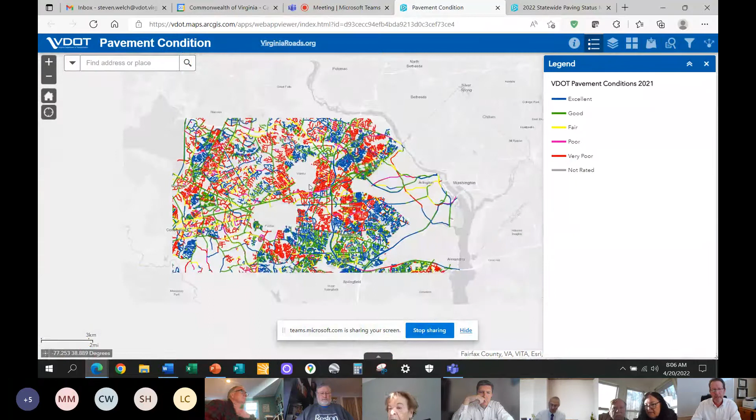One thing I've pointed out before is that we do not repave roads in the cities and towns or private areas, so that's why you'll see some empty spots. But as you can see, we have over 14,000 lane miles of roadway in Fairfax County to repave. So this is our pavement condition map, and again you can toggle around and move on it. Some people find this very useful and helpful to understand where things are. The next one I wanted to show you was our paving status map.

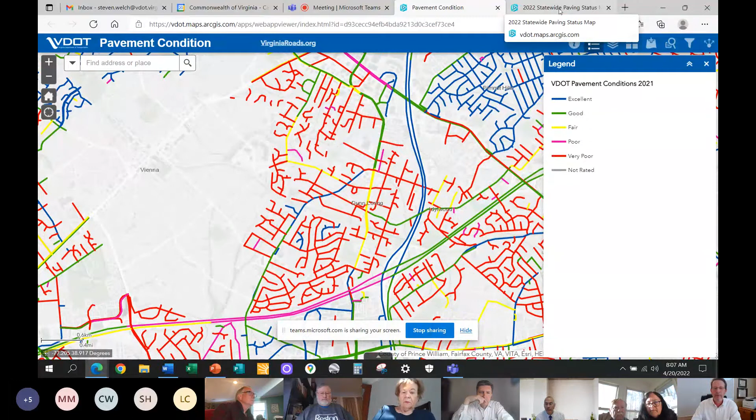This is what we are going to be doing this year. This is the active map that shows where we're paving roads in Northern Virginia this year.

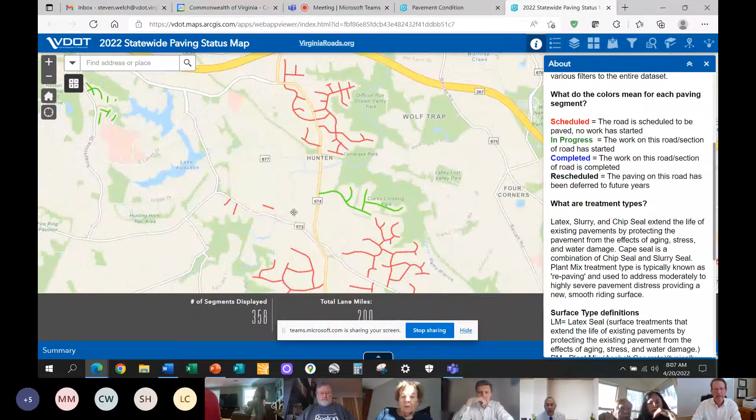I can zoom in here in this area, moving up into the Hunter Mill area mostly. As you move around, a couple nice things about the map: roads that are going to be worked on are scheduled in red, those that are green are in progress, and those that turn blue eventually are completed. Over here, you can see we've started work on Centerville Road, I guess it is.

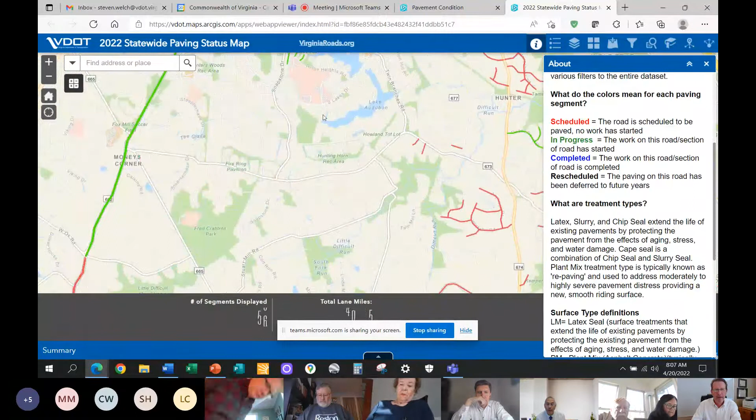Moving back over towards the Hunter Mill area, we go to a couple different neighborhoods. One of the other useful aspects of this map is you can click on a portion of it and it'll pop up the name of the VDOT project manager, their phone number, their email, and the contractor that's going to be doing the job.

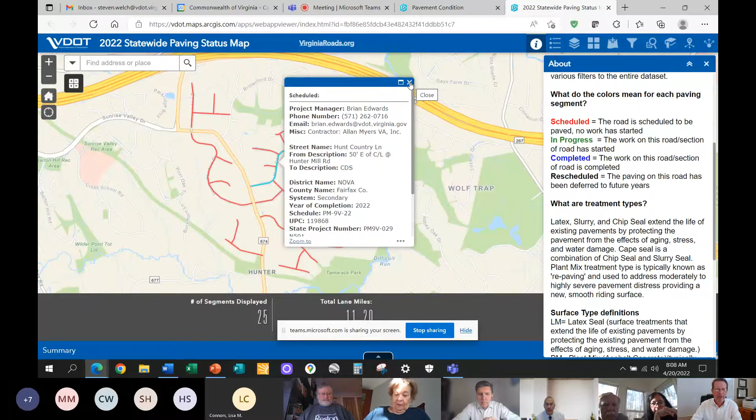When contracts are released, each contractor is given a window of time, say 4 months, to do 2, 3, or 4 different areas they've been awarded. We don't have the start and end dates on here, but you can email the contractor if you're interested in knowing when they might start, and continue to stay in contact with them for any questions, including after they've left.

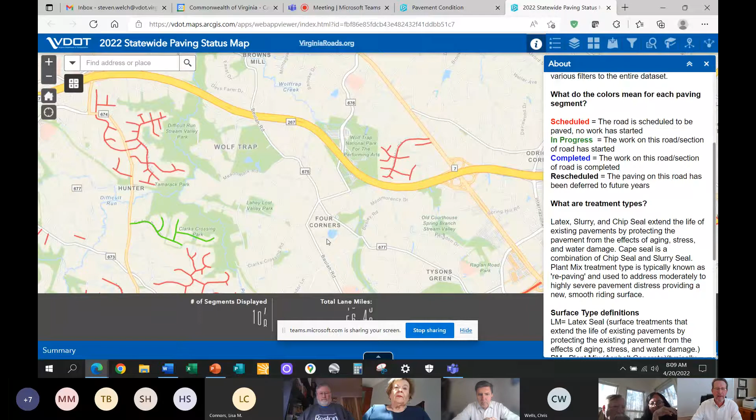Sometimes there's a question about when a piece of equipment is going to be removed because it's still sitting there. So it's a very useful map. We've been waiting for this to come out, and it came out a week and a half ago or so. That's a quick, brief overview on the VDOT pavement condition map and the schedule for this year.

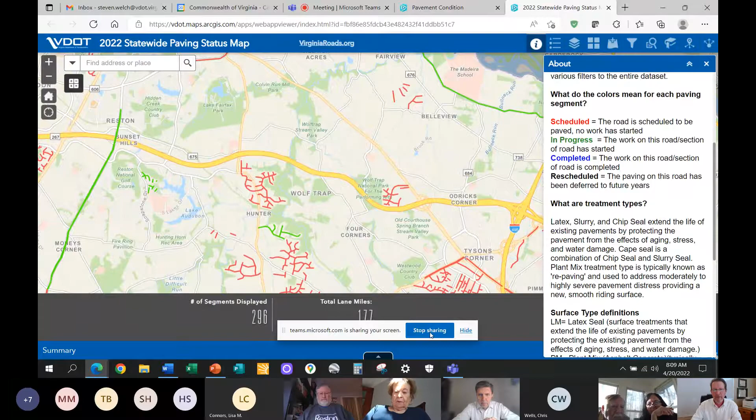I'm going to stop sharing for a moment. So the other two items I was asked to speak to: one is with respect to the school zone projects, one of which we are working on at Upper McNair Elementary School.

We're putting in a high visibility crosswalk in front of the school, along with an ADA compliant ramp, and reconfiguring the on-street parking in that area. We do have to remove some parking on both sides of the high visibility crosswalk for sight line distances, for both pedestrians to see cars and cars to see pedestrians.

But where there was opportunity further north, we're going to repurpose currently hashed-out areas along Fox Mill on the northbound side. Not only will we replace that on-street parking, we're actually going to increase the number of cars allowed to park on the street in that area.

That's a project I just found out yesterday or the day before that they are going to get started on the week of May 9th, so we're about 3.5 weeks out. It'll probably take a week and a half to two weeks to do the work, since there's some eradication, a lot of pavement markings to do, signs to install for pedestrians, and parking signs to remove and replace.

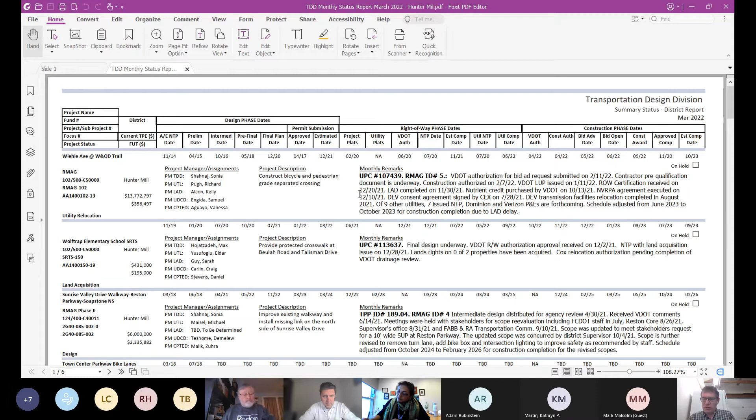You'd also asked about the temporary flexi posts. I reached out yesterday to VDOT but didn't hear back on that yet. So my understanding is those should still be coming to delineate the median until the actual concrete is constructed. I'll scroll down now and we can ask questions about any capital project.

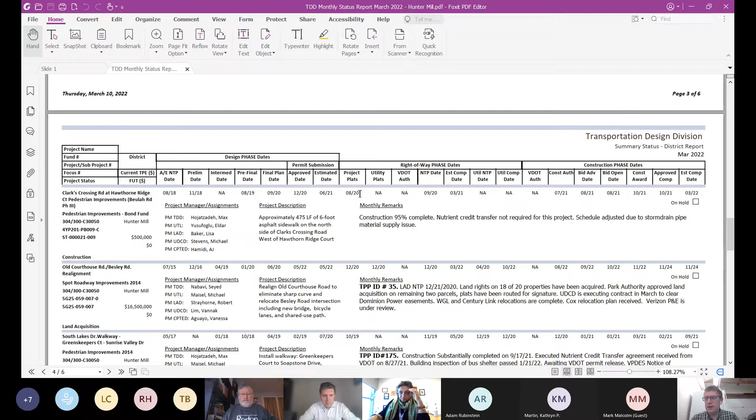On page 4, top of page 4 is Clark's Crossing at Hawthorne Ridge Court, and that is the last segment of what was originally Walk Along Beulah—the idea of creating a continuing pedestrian bicycle network out from the town of Vienna to Meadowlark Gardens, and this connection takes us down to the W&OD.

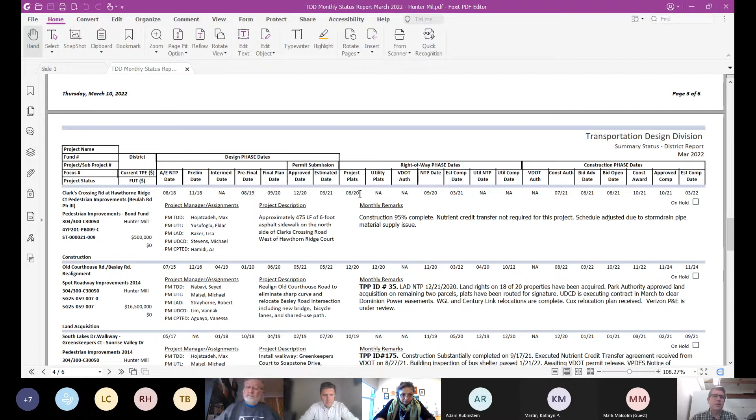So this is 95% complete at this time, so hopefully it's actually even maybe usable as we speak.

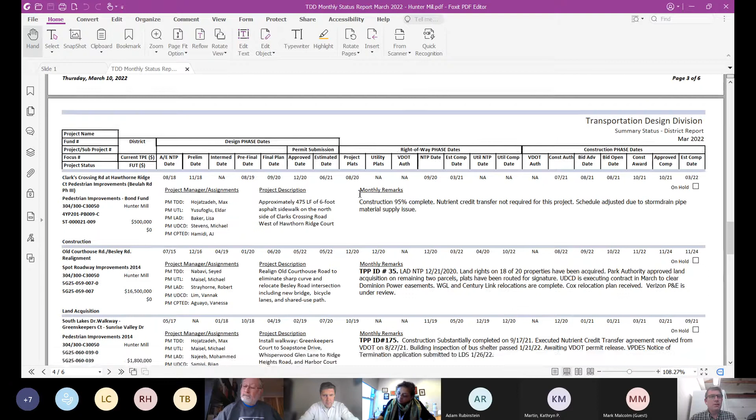Lower on that page is South Lakes Walkway. Those are a few different sections between Greenkeepers and Sunrise Valley. That was completed last year, but I got a chance to see it in the past few weeks for the first time, so that's nice to see.

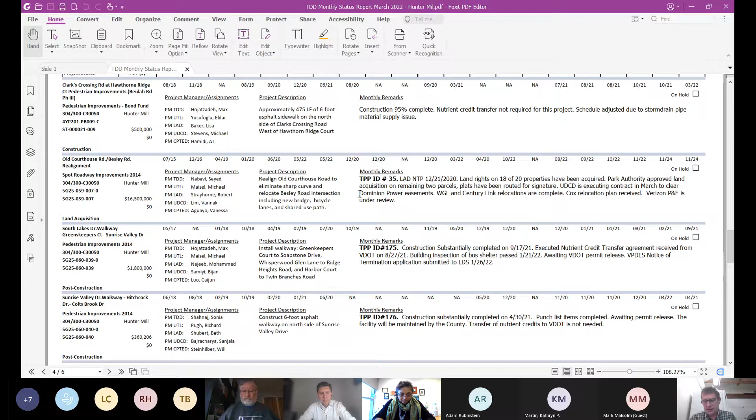As you know, Reston was built with lots of paths adjacent to the roadway, and along South Lakes you have your schools at Soapstone and then down at the high school. So there's definitely a need for east-west accessibility along South Lakes. That was good for me to see—a completed project of ours.

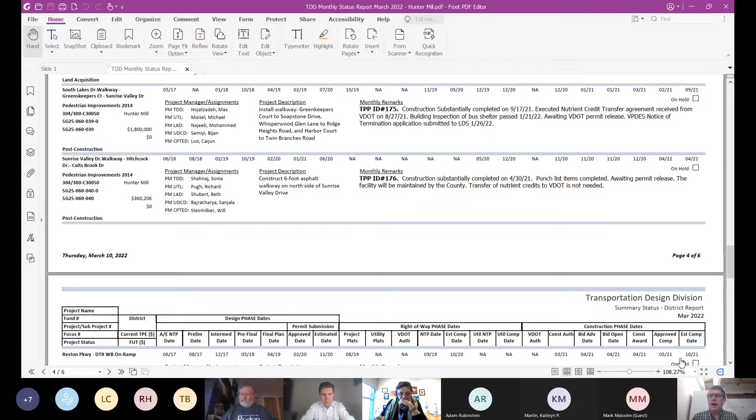I do have a separate presentation on another project, the Sunrise Valley Cycle Tracks, but if anybody has any questions on any general projects, I guess I'd go ahead and take those now.

Okay, I don't see any hands up. Not hearing or seeing anything.

I'll share my screen again and go over the Sunrise Valley Cycle Track. Speaking of big capital projects, this is a big capital project.

Sunrise Valley, as you know, has been a car-dominated street. We've completed sidewalks on the south side of Sunrise Valley, which never had sidewalks before, and we've improved the shared use path over by the Wiehle Metro. We have another section of shared use path to connect from Soapstone back to Reston Parkway. But in this western portion of Sunrise Valley, between the Reston Metro, the Herndon Monroe Metro, and the Innovation Metro, the original idea was on-road bike lanes.

Unfortunately, on-road bike lanes really don't serve many bicyclists. Only a small percentage, 10% at most of the bicycling public, are comfortable riding on road with vehicles such as on Sunrise Valley. So the need to change from those on-road bike lanes became apparent, because it would not be defendable that we'd spend millions of dollars, tear up Sunrise Valley, and just deliver on-road bike lanes that not enough of the public would benefit from.

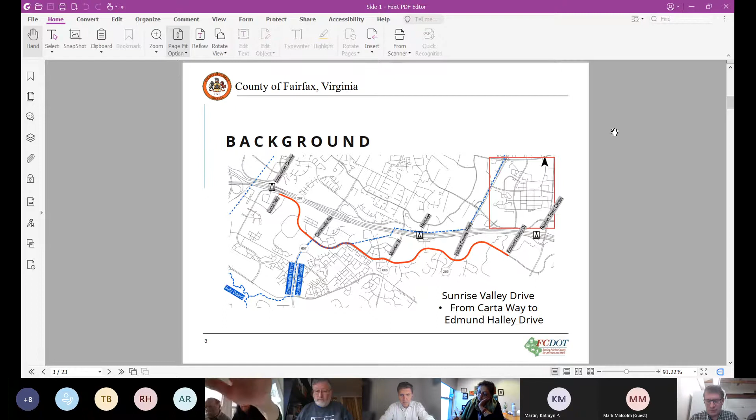So the current concept, and the current best practice in the United States, is something called a cycle track. A cycle track is off-road, raised to the level of the sidewalk, and parallel to the sidewalk—so a cycle track is really just a shared use path, parallel to a sidewalk, a separate bicycle and pedestrian facility. The limits of this project are on Sunrise Valley, from Carta Way to Edmund Halley Drive.

There are also projects on New Dominion Parkway in the town center area and Town Center Parkway. The reason for these projects is, of course, the economic development in this area—probably the most broad, robust economic development in the entire county when you combine these three station areas. So we have the need for high quality walking and biking, and access to our three new metro stations coming.

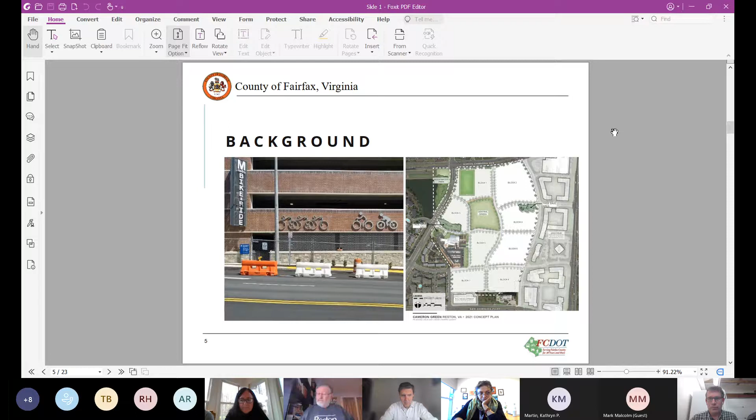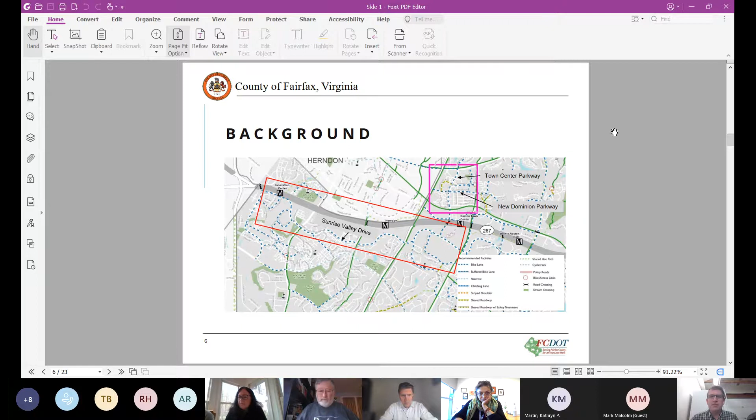So you're certainly familiar with the area and why we're doing it. The original bicycle master plan had the idea for on-road bike lanes, but as I've said, that is no longer best practices.

That best practices now is based on looking at what the volume of the road is and the speed limit, and although bike lanes are perfectly fine on low speed, low volume roads, as speeds and volume increase, you want to have a painted buffer for a bike lane, or then ultimately move to a shared use path or a separated facility. So all of these roads, Sunrise, New Dominion, and Town Center, have those characteristics.

So what are we talking about here? Like I said, it's essentially a shared use path that's parallel to a sidewalk. It provides a dedicated facility for cyclists that is for all ages and abilities.

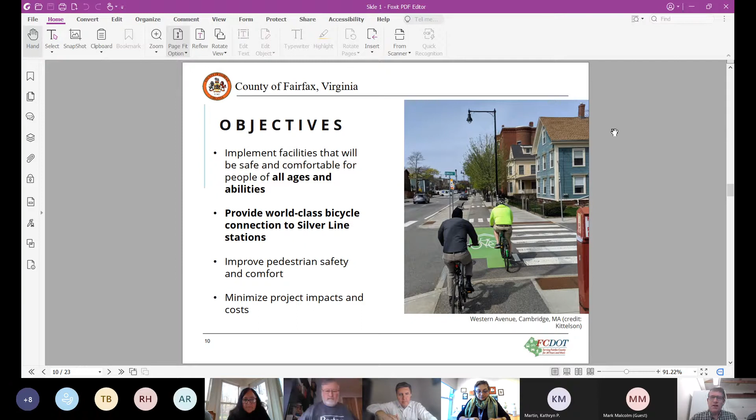It really provides a world-class bicycle connection to our world-class economic development and our multi-billion-dollar Silver Line. As importantly, it improves pedestrian safety and comfort because it gives the pedestrians a place to have their own, and we're doing intersection improvements that will add significant safety improvements for both pedestrians and bicyclists at the intersections.

The concept here is, again, it's a separated off-road facility, and the idea is to build into the roadway. The intersections have innovative treatments that we have nowhere else in Fairfax County yet. I'm sure when the other board members see the results of this project, this will be a demonstration project and set a high standard for the type of projects that we want to be doing in the future.

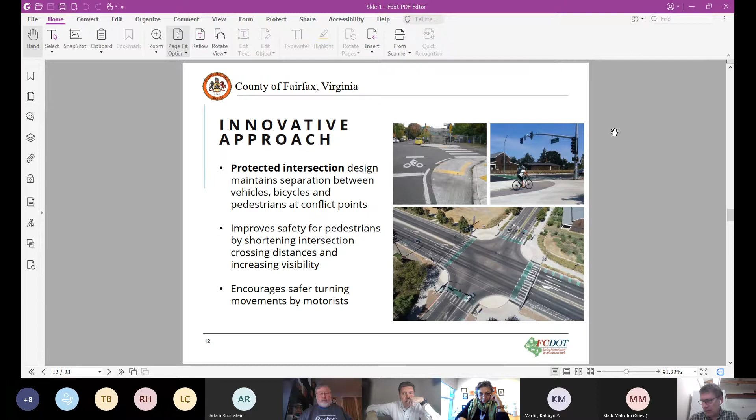You can see from the graphic, the lower right corner, there'd be separate crosswalks for bicycles and pedestrians. And then the radiuses, the intersections themselves have special features to protect the pedestrians. There's a protected concrete area separating traffic from the corners, and then the upper left picture has something called a truck apron, which is intended to allow a truck to have the turning movements it needs, but the regular cars turning through the intersection would follow the lines and see that concrete and go slow there.

Along the corridor, there's also opportunities for other innovative designs, such as what's called a floating bus stop, where, of course, we have Fairfax Connector bus service throughout Reston, and we have to accommodate bus stops and the bicycle facilities. So the idea there is you run the bicycle facility behind the bus stop, and you have a crosswalk across the bike lane to the bus stop.

So again, I mentioned it, but here's the real beauty of this project. We're working inside the roadway. As you may imagine, or if you know, Sunrise Valley has lots of underground utilities, all the telecommunications that's in the area, and a lot of areas have been landscaped, and have existing sidewalks.

So we're not looking to widen the road. We're not looking to build outside of the curb line. However, the cross section of Sunrise Valley has really too much valuable public right-of-way dedicated to cars only. So the concept here is to narrow the travel lanes, narrow the medians, and build into the roadway this raised bicycle facility.

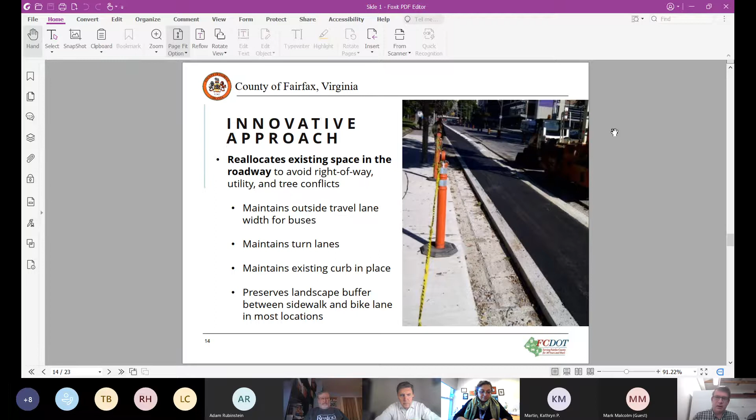So we'll essentially add a parallel curb into the roadway, and then have the raised bicycle facility on top of that curb. This will maintain an outside travel lane for buses, it'll maintain the turn lanes, it'll actually leave the existing curb in place, which leaves the existing drainage in place, and then we actually just tie laterally back into that drainage. It also preserves the landscape buffer between the sidewalk and the bike facility in most locations.

So from these cross sections, you can see basically what we're talking about. Of course, I'm an engineer, so I see these cross sections all the time, but if you just compare the top to the bottom, the top is Sunrise Valley today, the bottom is the proposal. And as you see, the sidewalk stays in the same place, so today's sidewalk is located where tomorrow's sidewalk would be.

But we bring the curb line into the roadway, and we accomplish that by narrowing the excessively wide lanes on the roadway. And then at intersections, we even eliminate the median and take it down to a double yellow. In between intersections, there's still opportunities for just narrowing the median. So that's essentially how it works. The rightmost lane is an 11-foot lane to accommodate buses, the leftmost lane is a 10.5-foot lane, and then the turn lane is an 11-foot lane.

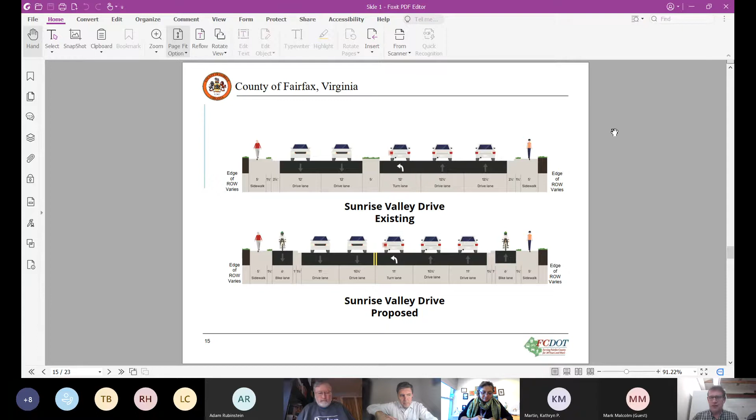We've also run extensive AutoTURN analysis, which is software that analyzes large vehicles, typically used at an intersection to analyze the turning movement of an 18-wheeler. We've actually used that same software along the entire 3-mile corridor to analyze the movement of an 18-wheeler moving through the corridor, checking for overlap. We found a couple of places where there could be conflicts, and we redesigned it to eliminate those conflicts. In the interest of time, I'll wrap up here.

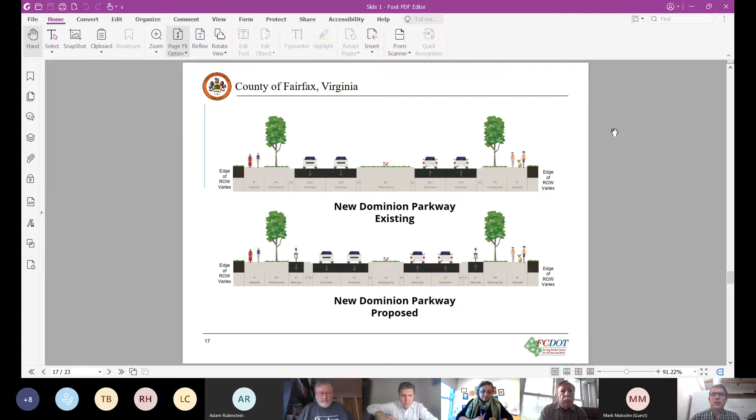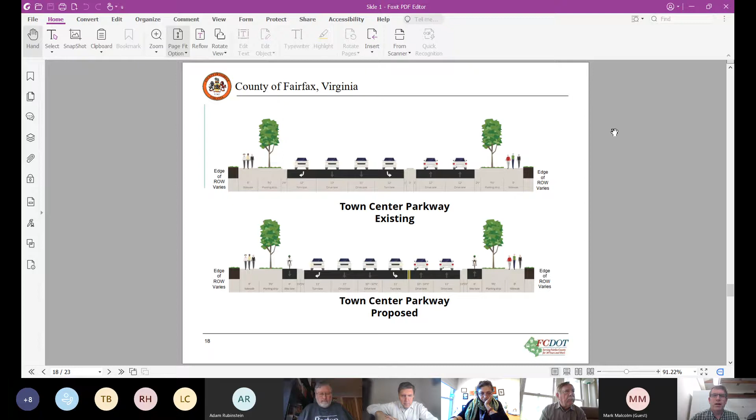Since this is so new and innovative, we've spent the past couple of years coming up with basically a proof of concept design, so it's almost to the level of a 30% design. The one thing that was unanalyzed was the actual drainage calculations for quantities and things like that. So that's what's going on now. We're wrapping that up. We're also looking at a sidewalk consistency analysis.

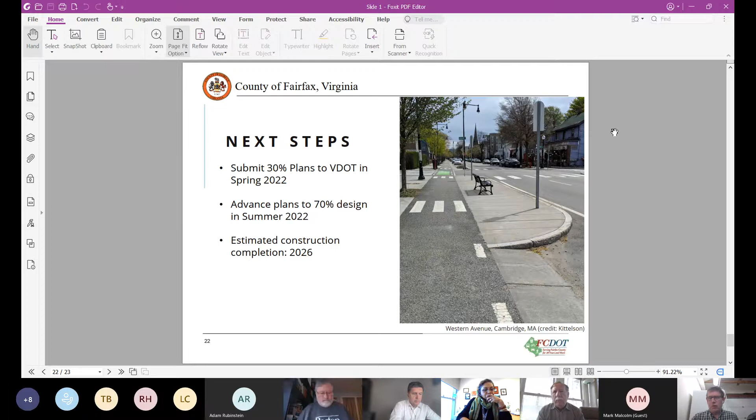The original idea was to leave all of the existing sidewalks in place, but there's been some concern about consistency of frontages throughout the Reston area, so we're analyzing the sidewalks to see if there are some areas that might need minor improvements to make the sidewalk consistent. We hope to wrap that all up this spring and forward it to the design process later on, with construction by 2026. So with that, I will stop sharing and take any questions.

Oh, the one thing I forgot to mention was Polo Fields. There is a concern with the curve there at Polo Fields. Since we will be rebuilding along that frontage, we will take a look at if there are any opportunities to change the super elevation or do any extra treatments along that curve there at Polo Fields. So that is part of our marching orders for that design.

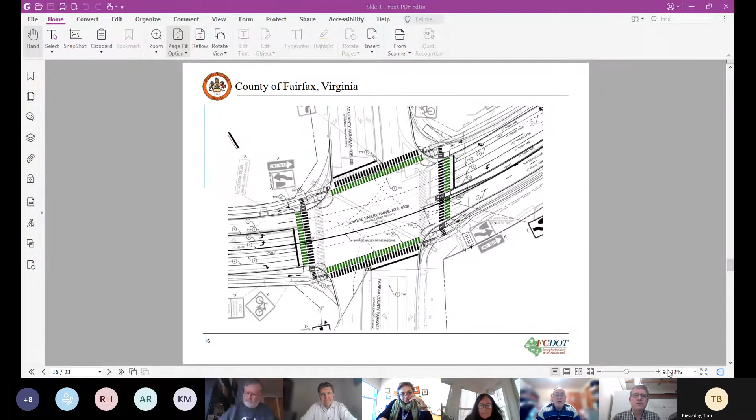That's very excellent, and I greatly appreciate it. I couldn't see it well enough the first time you presented it. Thank you, that's all I have.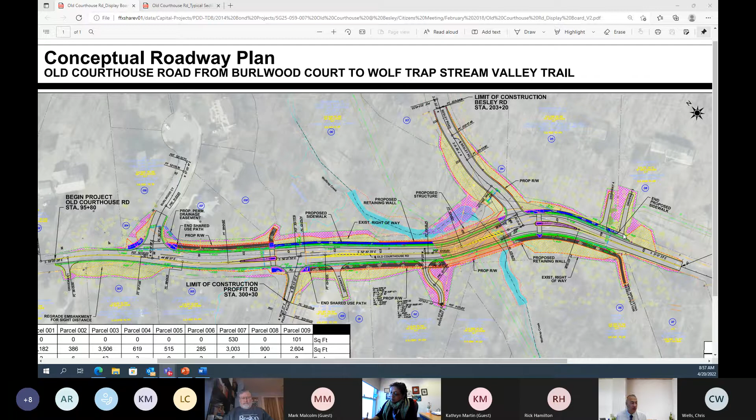So the formal construction of the project will start next summer, and the anticipated completion is May of 2025, and it's about a $16 million project all in, $16.5 million project all in. I'm going to stop sharing this, and I'm going to share one other slide for you.

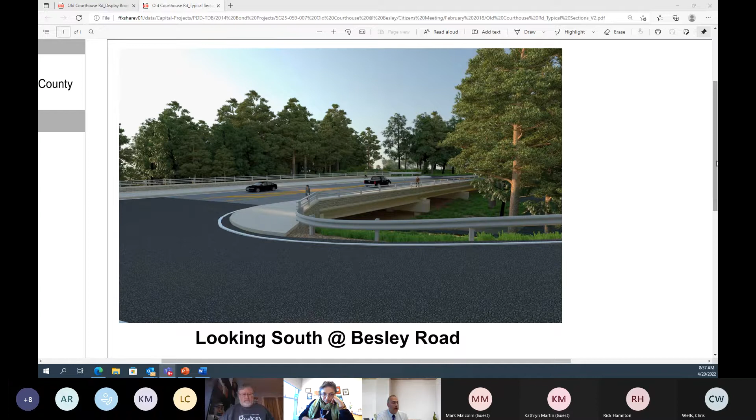Okay, can you see the picture? Okay, yeah. So this is if you were at Besley Road and you were looking towards Besley, this is what the bridge will look like. And then if you are on the other side, this is Besley Road over here. So if you're on the south side looking across towards Besley, this is what the bridge would look like.

You see the wide sidewalk over here. There's also a sidewalk on this side and a bike facility. So let me just slide this way a little bit. There we go. So you can see it's 2 lanes, one in each direction. There is a median at certain locations, and in some places there is not. And then on one side you have a shared use path, the other side is a sidewalk.

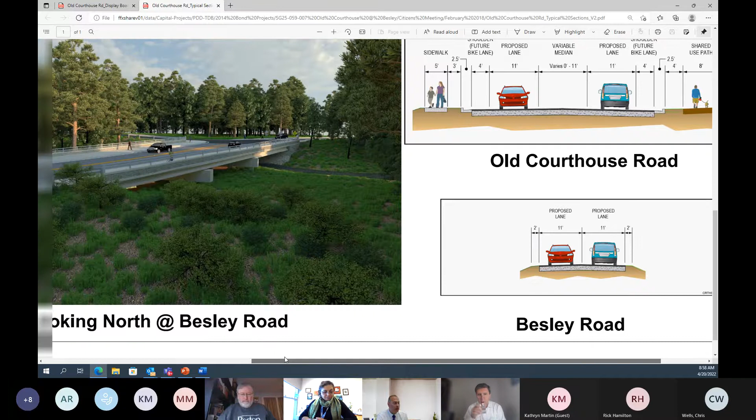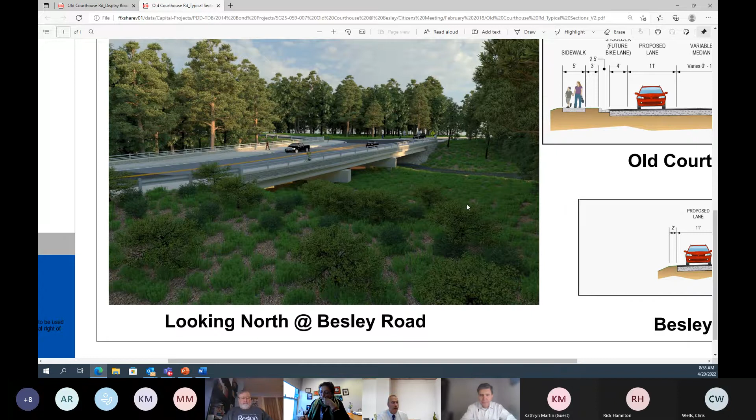So that's pretty much the update. The project is well underway. It is fully funded, and you will continue to see work now that the utility relocation has started through the rest of this year, and then the actual construction of the project will start next summer.